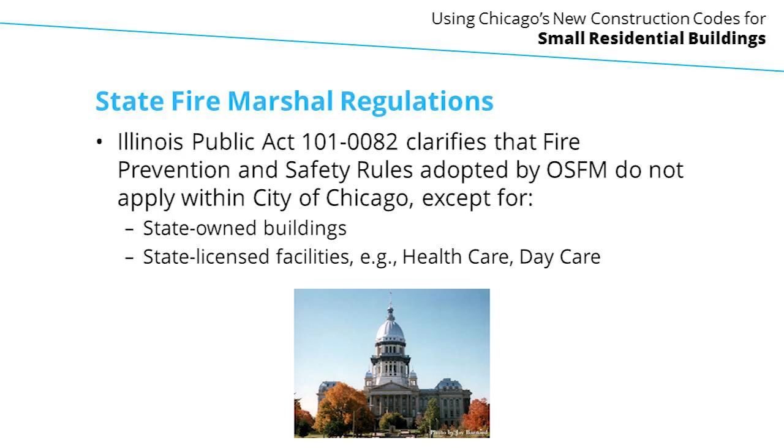That has been resolved by a recent change in the Illinois state law through Illinois Public Act 101-0082, worked out between the State Fire Marshal's Office, the Chicago Department of Buildings and the Chicago Fire Department. Now the state has reached a resolution that the state code does not apply within the city limits of Chicago, except for state-owned buildings or state-licensed buildings like hospitals and daycare facilities. So that is all good news. And part of it is because the city has brought its codes into greater alignment through this code modernization process. So that was a step in that direction.

A couple of things that affect small residential buildings. There are a number of differences between the IBC and the City of Chicago's new code, changes in some of the definitions. But a couple that particularly relate to small residential I've highlighted here. The fire separation distance is normally the distance between a building and a property line, or in the case of a public way, the distance between the building and the center line of a public way, like the street.

The Chicago Code definition is a bit different. It measures that distance between the building and the opposite side of that public way, or the opposite side of the street. So that distance becomes greater, taking advantage of the full width of the street rather than just to the center line. So that tends to make the requirement for exterior wall ratings a little more liberal. And that reflects the density of the built environment in the city.

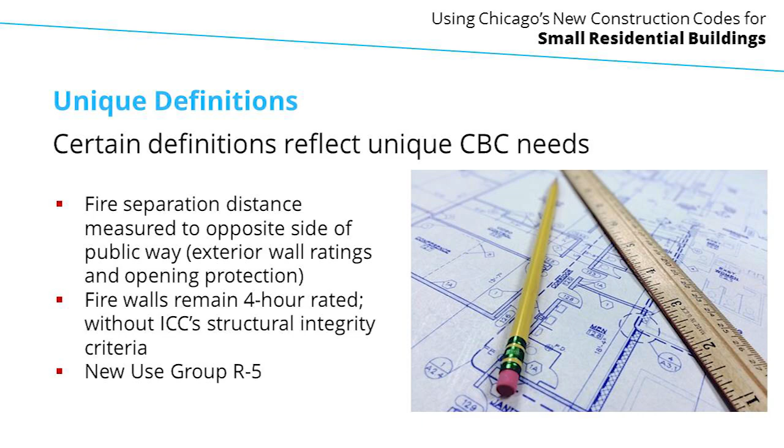And you've heard already about the new use group R5. I won't mention that again, but I do have the definition highlighted on this next slide. This is the definition of R5, and there are a couple things I want to highlight. An R5 is defined to be residential buildings that are no more than 4 stories above grade and have 1, 2, or 3 dwelling units. And there are no other occupancies associated with the building, no mixed use. Accessory buildings are also allowed, provided they're not more than 2 stories. So that is the definition for an R5 in Chicago. As Grant mentioned, the IRC is not being used in Chicago.

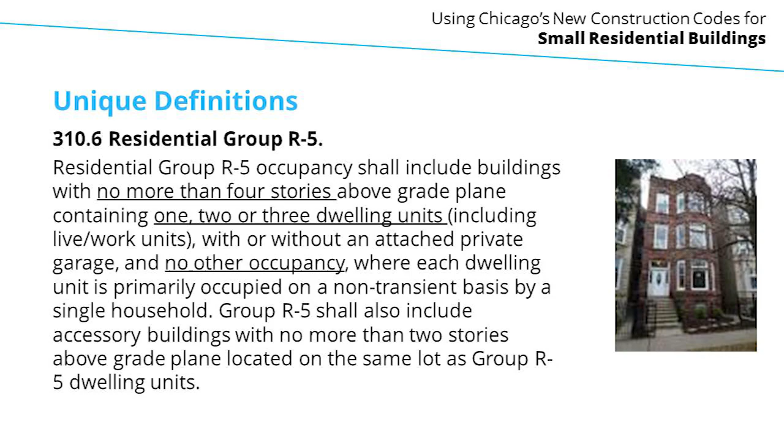I want to talk a little bit about what I would say is a change in philosophy regarding fire safety with the new code. The IBC and its companion document, the IFC, the International Fire Code, over about the last 30 years, since about the mid-'80s, have relied more upon what we call active fire suppression systems versus passive. Passive fire protection you can consider to be barriers like firewalls and rated floors and rated roofs. That serves to provide compartmentation for fire spread. The IBC over the years has moved to active fire protection, such as sprinkler protection, fire detection systems, and annunciation systems. That has proven to provide a benefit in fire safety that has been measurable across the United States.

And so that philosophy you'll now find in the Chicago Building Code. There will be more requirements for sprinklers, not just in residential, but on the commercial building side as well. And generally speaking, the new Chicago Code will provide more liberal allowable areas for sprinkler protection and a little less liberal reliance on street frontage increase, which was kind of a passive thing as well. So that philosophy is showing in the new code.

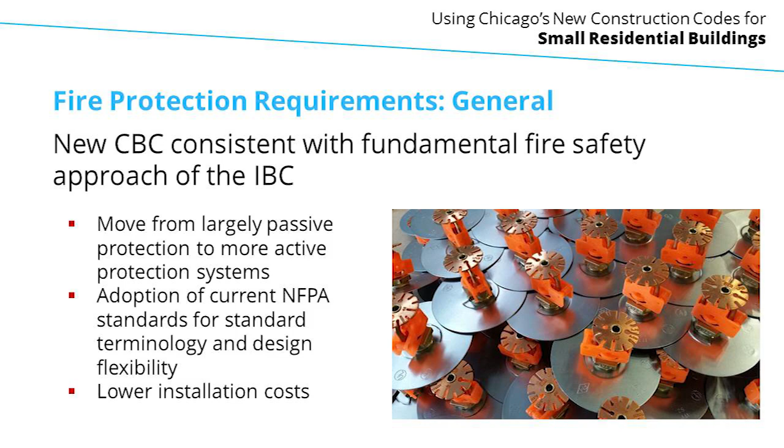And in the effort, the Chicago Fire Department was a participant on our working committee, and we made sure that the current method of operation the fire department uses with respect to how they approach a building and what they expect to find in a building for fire sprinkler water supplies, for example, fire alarm system notification of occupants, and standpipe system operations, these are the built-in piping systems for manual fire suppression, those have all been harmonized in the new Chicago Building Code with what the fire department operations have been.

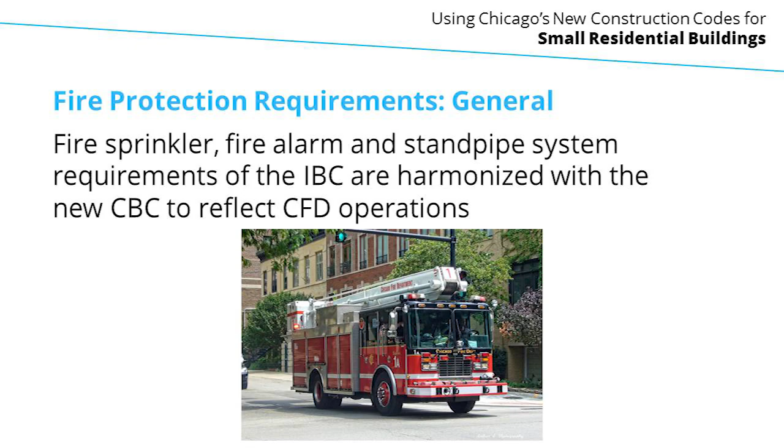Generally also, the electrical requirements associated with these fire protection systems, like fire pumps and fire alarm systems, have been modified to reflect the practices that are in the national codes, generally somewhat of a relaxation and generally more cost effective.

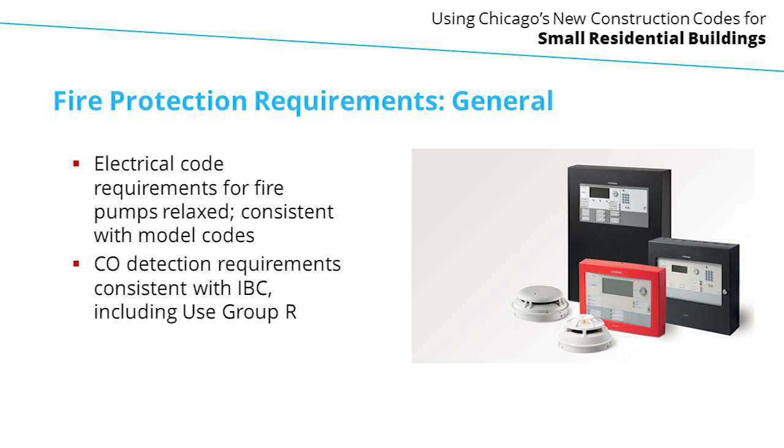Similarly, the requirements in the code for carbon monoxide detection have been harmonized with the national requirements in the international codes, and there are fewer requirements for carbon monoxide detection in the new Chicago Building Code. You will find requirements for carbon monoxide detection in residential uses where there is fuel-fired equipment, like the national standards.

Okay, one of the big things you've heard today from both of my colleagues here on the podium: starting in January of next year, no matter whether you use the old code or the new code, there'll be a requirement for automatic sprinkler protection in residential occupancies other than R5s, other than where there are 3 or fewer units, but anything with 4 or more units, automatic sprinkler protection will be required. There are some relaxations and cost reductions to help this get in process here.

The automatic sprinkler systems in low-rise residential will not need to be monitored. They will not need off-site monitoring. And also, there are ways to build low-rise residential without automatic sprinklers. It's been talked about in townhouses, for example. If 3 or fewer units are separated by 4-hour firewalls, no sprinklers are required.

Or in R2 occupancies, which are multifamily, less than or equal to 4 stories, with 2 or fewer units in a fire area, sprinklers would not be required if there are 2 means of egress using stairways within that fire area.

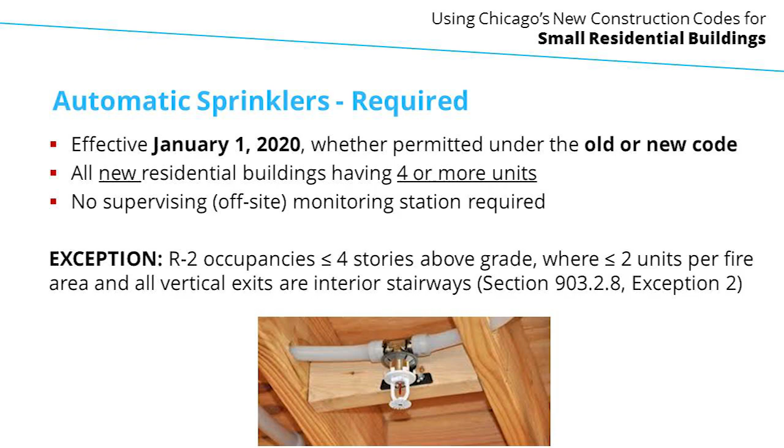Hold on, please, till the end. Are we talking about 13D? I'll get to that in a minute. How about that?

What are the differences? NFPA 13 is the standard for the design and installation of sprinkler systems, essentially in commercial buildings. High-rise residential or other commercial buildings, you'd be looking at an NFPA 13 system. Those systems have been around for over 100 years, and they've got a really good track record of success.

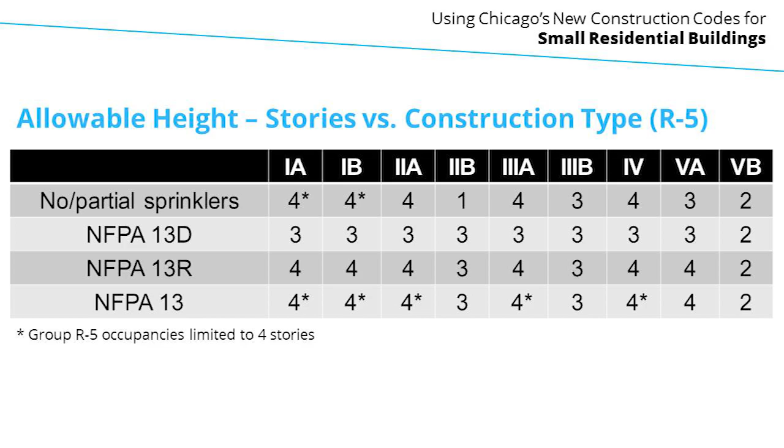So the Chicago Building Code will allow the use of NFPA 13D systems in R5, even when they're not required.

These are individual detectors. And they are required to be in each sleeping room, outside of the sleeping rooms within 15 feet of those sleeping rooms, in each story of a dwelling unit, and at the top of each interior exit stairway. They used to be referred to as single station smoke alarms, smoke detectors. Now we call them smoke alarms. They are required in the code to be AC powered. You will find them typically with a battery backup, but the code will require new installations to be AC powered.

There's also a third wire on these detectors so that they can be interconnected, such that if one detector is activated, it activates all the detectors that are interconnected. And it's allowed to be integral with a carbon monoxide detector, which will also be required. And that is the end of our presentation.